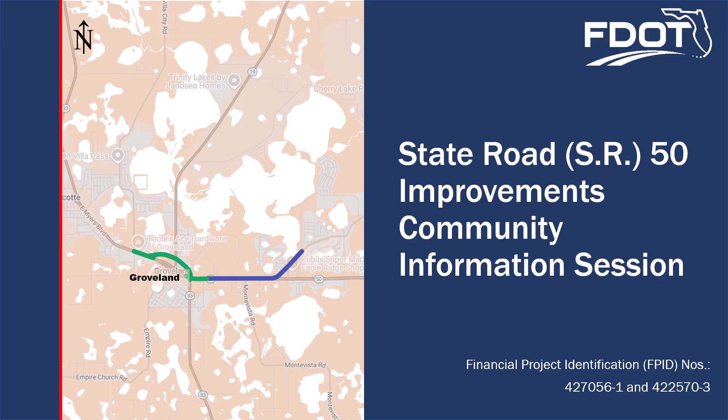The Florida Department of Transportation is holding this open house to update you on two projects along State Road 50 in Groveland. First is the proposed realignment of a section of State Road 50 to the north of downtown Groveland. The second is a section of the South Lake Trail. Both projects are set to begin construction later this year.

The project limits for the State Road 50 realignment are from Villa City Road, or County Road 565, to 2nd Avenue within the city of Groveland. The project will construct a new section of State Road 50 to the north of downtown Groveland. The Financial Project Identification or FPID number for this project is 427056-1.

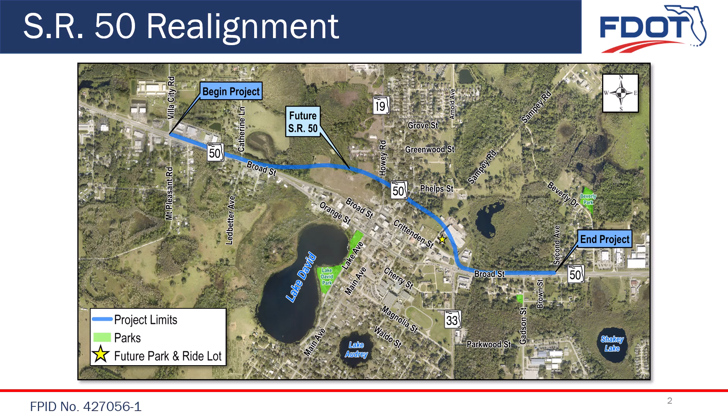Today, State Road 50 is a 4-lane roadway, with 2 travel lanes in each direction. Trucks account for a significant portion of the area's traffic and are currently challenged at the intersections with State Road 19 and State Road 33 as they make the necessary turning movements. The realignment will improve safety by eliminating the need for heavy truck and regional traffic to travel through downtown Groveland. It also supports the city's goal of having a pedestrian and bicycle-friendly downtown core.

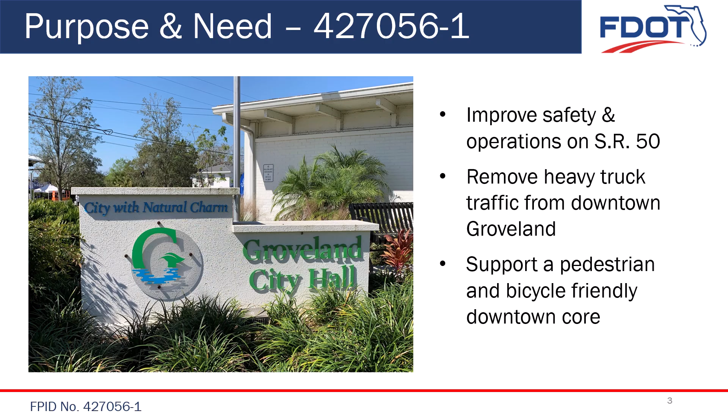The proposed reconstructed State Road 50 and new alignment will have a few different configurations, or typical sections. From Villa City Road to Catherine Lane, the typical section provides 4 12-foot wide travel lanes separated by a median. A 14-foot wide shared-use path along westbound State Road 50 will accommodate bicyclists and pedestrians. A 5-foot wide sidewalk will be provided along the eastbound side of the road.

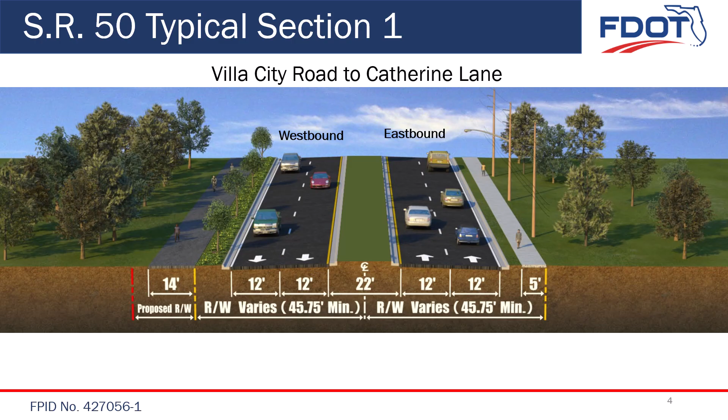From Catherine Lane to State Road 33, State Road 50 continues to have 4 12-foot wide travel lanes separated by a median. The shared-use path along westbound State Road 50 is slightly narrower at 10 feet wide, and the sidewalk along eastbound State Road 50 is slightly wider at 6 feet. Please note that this section includes downtown Groveland, where the bicycle facilities leave State Road 50 and continue through downtown along local streets.

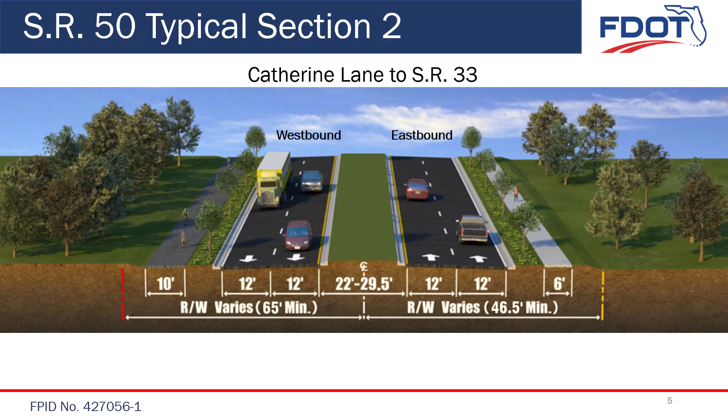The third typical section is from State Road 33 to 2nd Avenue at the eastern end of the project. For eastbound State Road 50, there are 2 travel lanes, each 12 feet wide, with a 6-foot wide sidewalk. To remain on State Road 50 when traveling westbound, drivers will make a right turn onto the new realigned State Road 50, which is represented by the 2 right turn lanes shown in the typical section. There is 1 through lane to travel along the local streets in downtown Groveland and 1 left turn lane to access State Road 33. The shared-use path along westbound State Road 50 is 14 feet wide in this section.

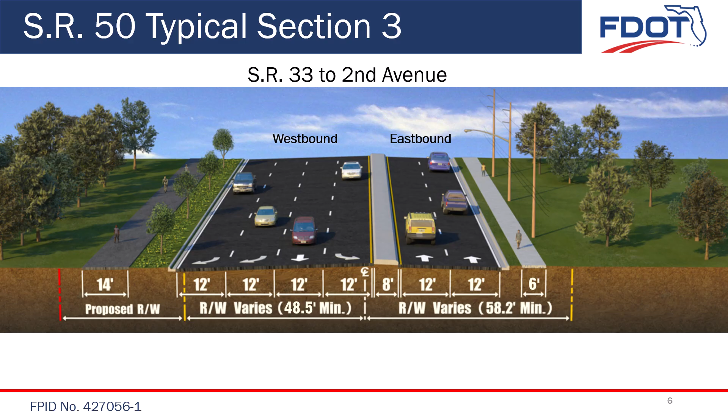The project will install a new traffic signal at the intersection of State Road 50 with Broad Street and Orange Street. Eastbound vehicles entering the intersection at Broad and Orange Streets will go straight to continue on the realigned State Road 50. To enter downtown Groveland, vehicles will make a right turn. Westbound vehicles will transition from the realigned State Road 50 to the existing roadway. They also will be able to make a left turn into downtown Groveland.

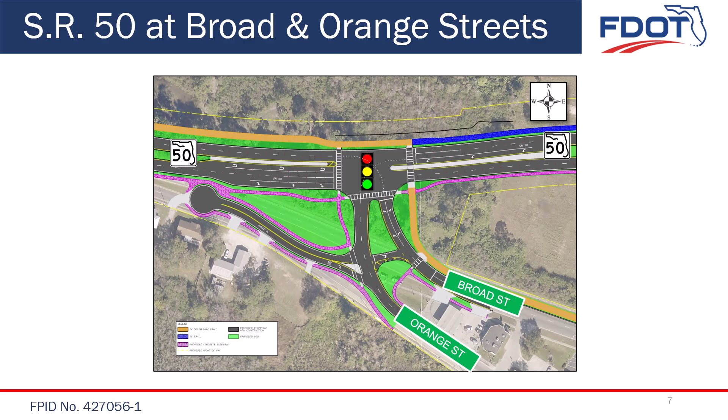Westbound vehicles leaving downtown will be able to make either a right turn onto the realigned State Road 50 or a left turn onto existing State Road 50. At this intersection, the South Lake Trail leaves the north side of State Road 50 and goes into downtown Groveland along the north side of Broad Street.

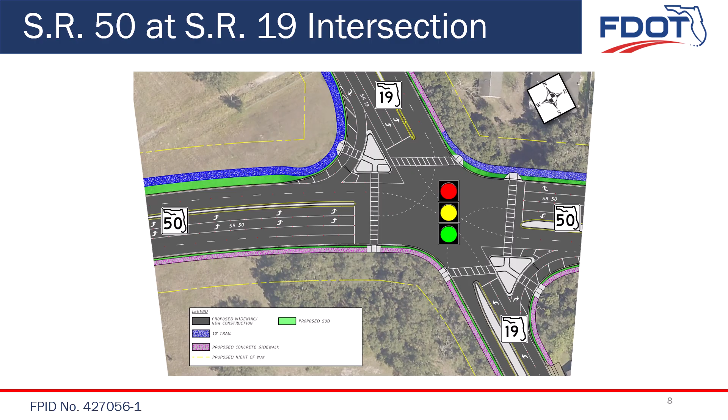The new intersection of State Road 19 and the realigned State Road 50 will also be signalized. Vehicles will be able to go in any direction, straight, right, or left. Pedestrian refuge islands will be located at the southeast and northwest quadrants.

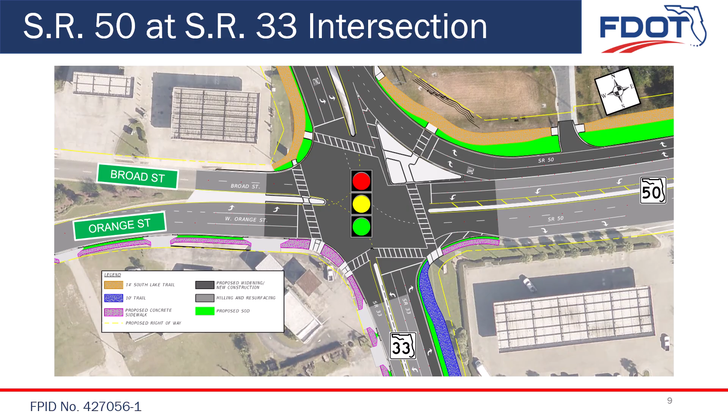The intersection at State Road 33 will be signalized and a pedestrian refuge is provided in the northeast quadrant of the intersection. State Road 33 is where the realigned State Road 50 begins for westbound traffic and ends for eastbound traffic. The South Lake Trail also transitions to the north side of existing State Road 50.

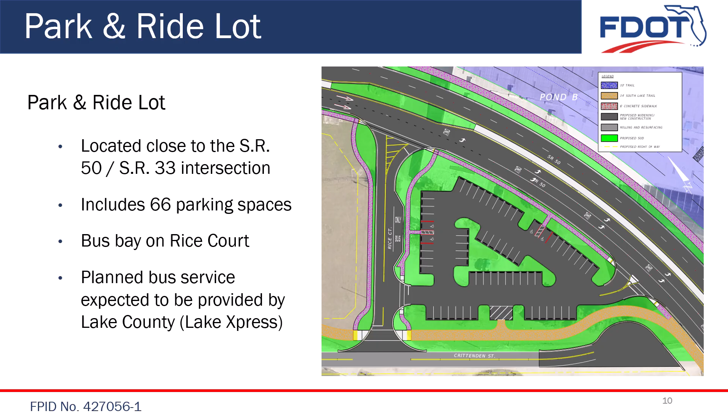Another improvement planned within this project is a new park and ride lot for commuters close to the intersection of State Road 50 and State Road 33. It will include 66 parking spaces with a bus bay planned on Rice Court. Service is expected to be provided by Lake County's Lake Xpress system.

Also included within this project is construction of a portion of the South Lake Trail. From Villa City Road to Broad Street, the trail is located on the north side of State Road 50. It then crosses State Road 50 to follow the north side of Broad Street. From there, the trail proceeds north on the west side of State Road 19 to Crittenden Street.

The trail then follows the north side of Crittenden Street to the realigned State Road 50 at the Park and Ride lot, before continuing beyond State Road 33 on the north side of State Road 50. This section of trail will connect to the South Lake Trail Phase 3B project that will be discussed shortly. The South Lake Trail is part of the coast-to-coast trail system to connect Florida's west coast to the east coast.

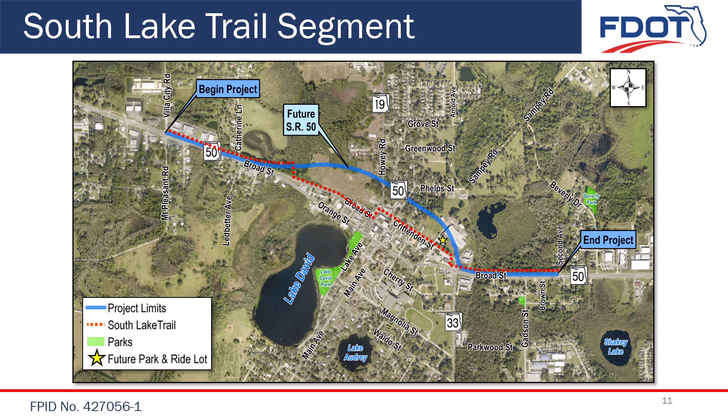Construction of the improvements planned with this project will occur in 3 phases. Access to adjacent properties will be maintained throughout all phases of construction. Phase 1 of construction consists of the newly aligned segment of State Road 50, along with improvements to Catherine Lane, State Road 19, and Crittenden Street. This phase also includes the construction of the new Park and Ride lot.

Phase 2 of construction consists of the improved intersection of State Road 50 and State Road 33, with improvements continuing along State Road 50, State Road 33, Orange Street, and Broad Street. Phase 3 of construction consists of the improvements to State Road 50 starting at Villa City Road, heading east towards the new alignment of State Road 50. The construction in this phase will also continue past the divergence of the new State Road 50 alignment and includes improvements to Broad and Orange Streets.

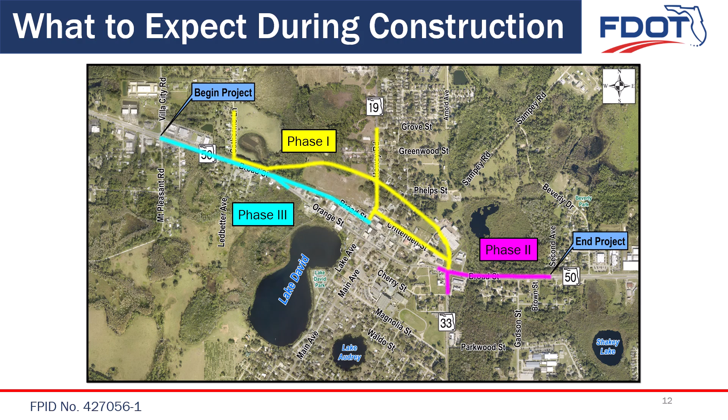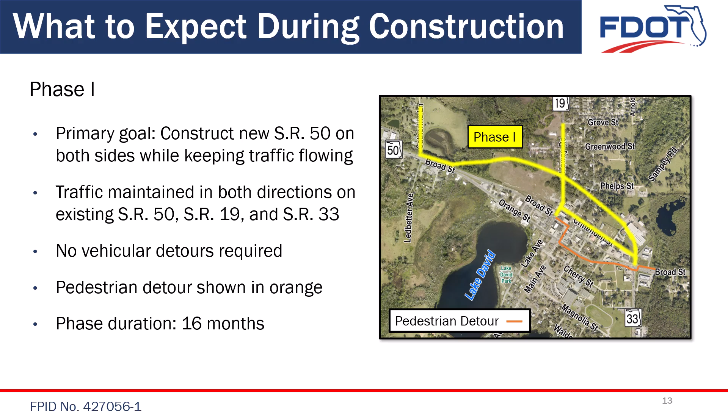The overall intent of Phase 1 is to construct the new State Road 50 roadway on both sides while maintaining traffic flow. During Phase 1, traffic will be maintained in both directions on existing State Road 50, State Road 19, and State Road 33. There will be no required detours for vehicular traffic. However, there will be a pedestrian detour implemented in this phase, with the path as shown in orange. The anticipated length of this phase is 16 months.

Phase 2 involves the enhancements to the State Road 50 and State Road 33 intersection, extending along State Road 50, State Road 33, Orange Street, and Broad Street. During Phase 2, traffic will be maintained in both directions on the existing State Road 50, State Road 19, and State Road 33. There will be no lane closures during this phase, however, expect lanes to shift to accommodate construction.

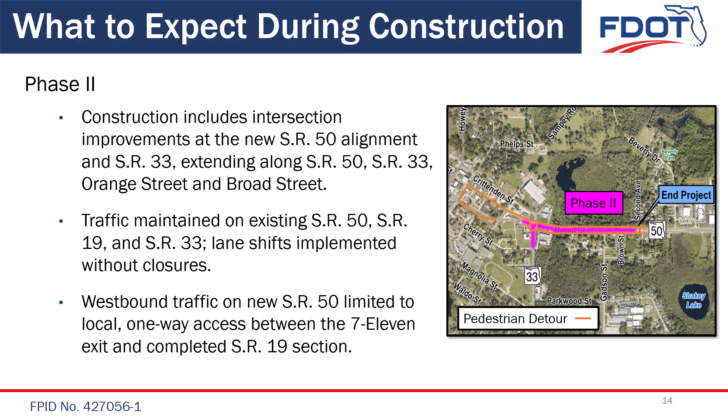During this phase, westbound traffic on the new State Road 50 alignment will be limited to local one-way access between the 7-Eleven exit and the completed section of State Road 19. There will be no required detours for vehicular traffic. There will be pedestrian detours implemented in this phase, with the path being shown in orange. The anticipated length of this phase is 6 months.

Phase 3 construction includes improvements along State Road 50 from Villa City Road eastward toward the new State Road 50 alignment. This phase also extends beyond the point where the new alignment separates, with additional work on Broad Street and Orange Street. During Phase 3, traffic will be maintained in both directions on State Road 19 and State Road 33, and the existing State Road 50 will remain open until the new sections are complete. There will be no lane closures during this phase, however, expect lanes to be shifted to accommodate construction.

Westbound traffic on the new State Road 50 alignment will open first, followed by eastbound traffic once the work is finished. There will be no required detours for vehicular traffic. There will be pedestrian detours implemented in this phase, with the path being shown in orange. The anticipated length of this phase is 6 months. Once again, access to adjacent properties shall be maintained throughout all phases of construction.

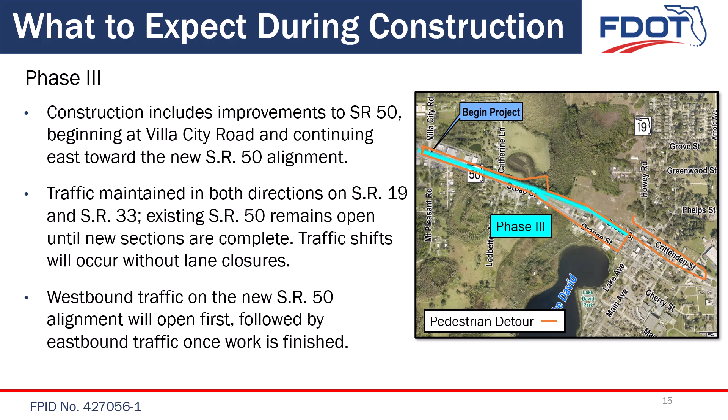The project design phase is ongoing and will be completed by spring 2026. Right-of-way acquisition is underway and will be completed by spring 2026. Construction is anticipated to begin in the fall of 2026 at an expected cost of $39.6 million.

The second project we will present is construction of the South Lake Trail Phase 3B, a 1.8-mile-long section of multi-use trail extending from 2nd Avenue to Silver Eagle Road. The financial project identification, or FPID number for this project is 422570-3. This segment of the path will connect to the segment of the South Lake Trail included in the State Road 50 realignment project.

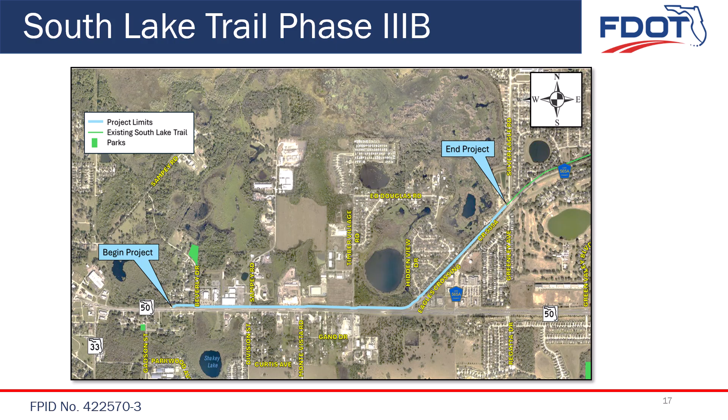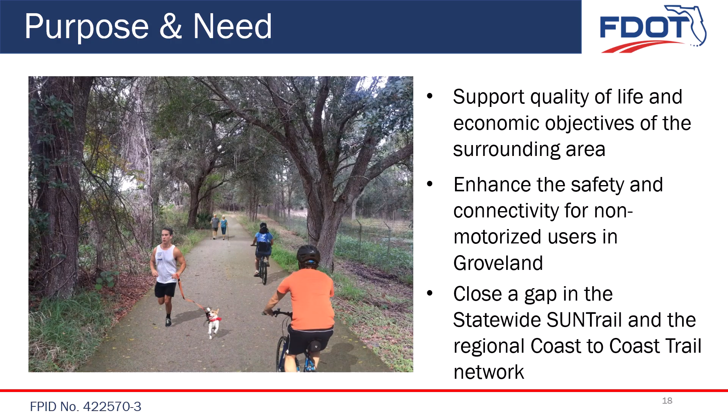The South Lake Trail Phase 3B project will support quality of life and economic objectives of the surrounding area, enhance the safety and connectivity for non-motorized users in Groveland, and close a gap in the statewide SUNTrail and the regional coast-to-coast trail network. The trail width varies from 10 to 14 feet. The trail will be separated from travel lanes by curb and gutter and a grassed buffer that will be at least 5 feet wide.

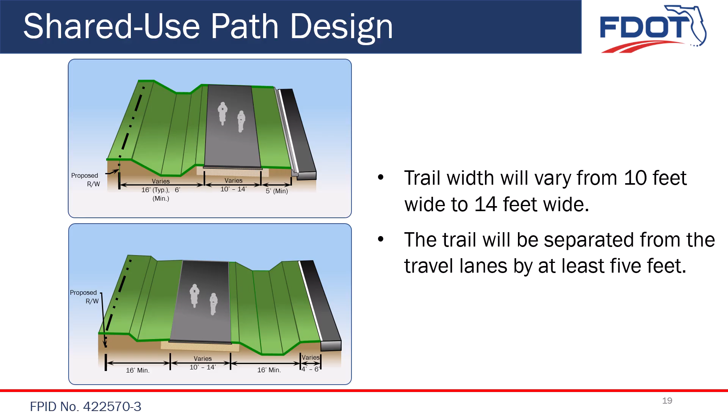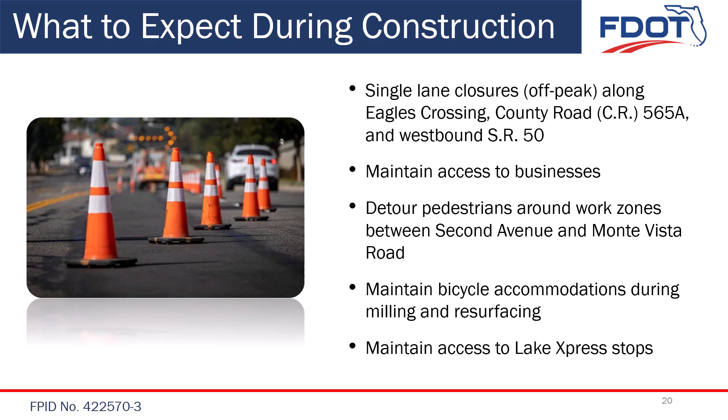While the trail is being constructed outside of the travel lanes, some single-lane closures will be needed during off-peak hours along State Road 50, County Road 565A, and Eagles Crossing. The contractor will maintain access to businesses. Pedestrians will be detoured around work zones between 2nd Avenue and Monte Vista Road. Bicycle accommodations and access to Lake Xpress bus stops will also be maintained.

The project design phase is ongoing and will be completed by spring 2026. Right-of-way acquisition is underway and will be completed by spring 2026. Construction is anticipated to begin in the fall of 2026 at an anticipated cost of $3.4 million.

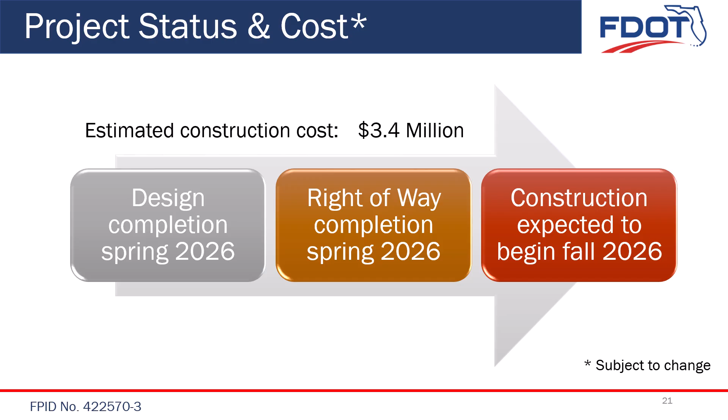For additional comments or questions, you may contact the project manager, Shelley Chinqui, or the construction project manager, Karen Madrid, through email, mail, or by phone through the contact information as shown. The contact information is also available on the comment form and the project information handout. To learn more about this project, go to www.cflroads.com. Type the project number 427056-1 for the realignment project, or 422570-3 for the trail project in the search box at the top right, and click Go.

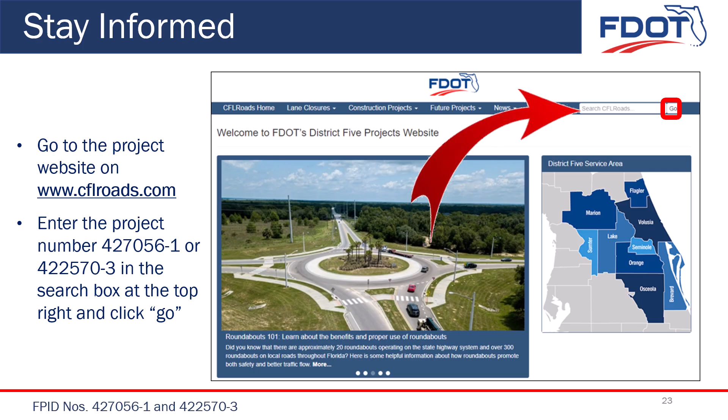The FDOT encourages public participation and feedback at all phases of its projects. In accordance with Title VI of the Civil Rights Act, public participation is solicited without regard to race, color, national origin, age, sex, religion, disability, or family status. Persons wishing to express their concerns about Title VI may do so by contacting Melissa McKinney, District 5 Title VI Coordinator, by mail at 719 South Woodland Boulevard, Mail Station 520, DeLand, Florida 32720, by phone at 386-943-5077, or email at

melissa.mckinney@dot.state.fl.us. You may also contact Al Sanders, Interim State Title VI Coordinator, by mail at 605 Suwannee Street, Mail Station 65, Tallahassee, Florida 32399, by phone at 850-414-4753, or email at aldrin.sanders@dot.state.fl.us.

On behalf of the Florida Department of Transportation, thank you for attending this public meeting and providing your input on this project. If you have comments or questions after the meeting, please submit them by March 2, 2026. Have a good evening, and remember, safety is everyone's responsibility.